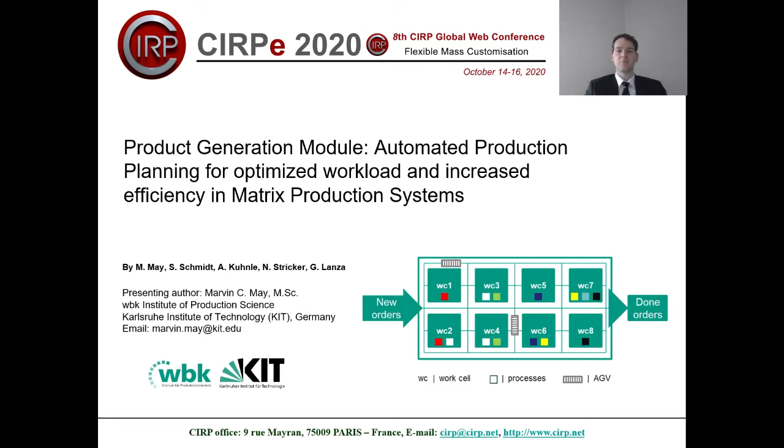On behalf of the entire team, I would like to warmly welcome you to this presentation of the publication entitled Product Generation Module, Automated Production Planning for Optimized Workload and Increased Efficiency in Matrix Production Systems within the CIRPe2020 Global Web Conference. The CIRPe2020 is about the topic of flexible mass customization, and matrix production systems serve as one manifestation of a flexible mass customization ready production system.

There are quite a few reasons for matrix production systems to gain attraction within the last periods of time. First of all, there is a trend towards mass customization in the sense that many customers require individualization and require high quality at low prices. This poses several requirements on regular production systems and often comes hand in hand with shortening product life cycles. Additionally, external regulations, in particular in respect to protecting the environment, can have major effects and push companies towards matrix production systems as a manifestation of flexible mass customization.

Matrix production systems are both adaptable and flexible, as they allow products and the combination of products to change within the lifetime of the production system. However, they require a very high investment cost and are expensive to operate and install. Thus, our proposed product generation module increases the efficiency and enables companies to overcome the expensive integration of matrix production systems by boosting their turnover afterwards.

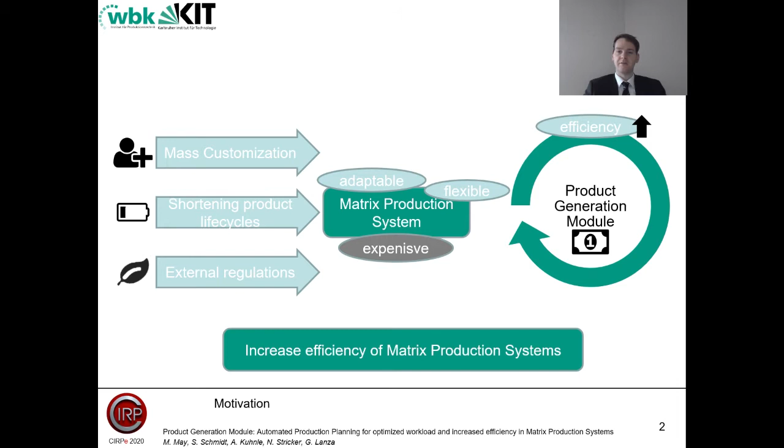Let's look at matrix production systems and how they are constituted. First of all, matrix production systems are made of a matrix-shaped layout. For instance, the figure below, which is a 4x2 matrix layout with redundant work cells. Partially redundant in the sense that each work cell has the ability to perform different value-adding activities, which we dub as processes in this case, within work cells. And some of them might be similar, some of them might be equal. However, the important part within matrix production systems is the ability of more than one work cell to perform a given process.

Furthermore, the ability and flexibility of matrix production systems come from the decoupled material flow. This is realized by the implementation of AGVs, which autonomously guide the material transport within the system. This is the reason for matrix production systems being very flexible. Thus, whenever a machine encounters any failures or further troubles, one singular machine does not affect the output of the entire system heavily, and the rest of the system can still work as prepared, and thus it allows the production system to deal with much larger flexibility and much larger demand changes.

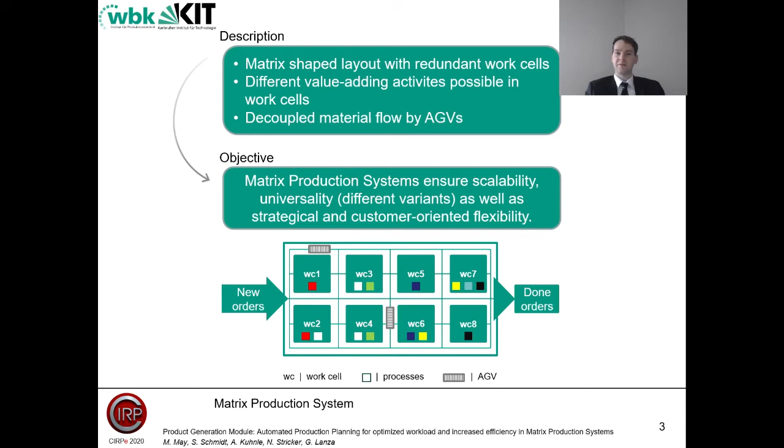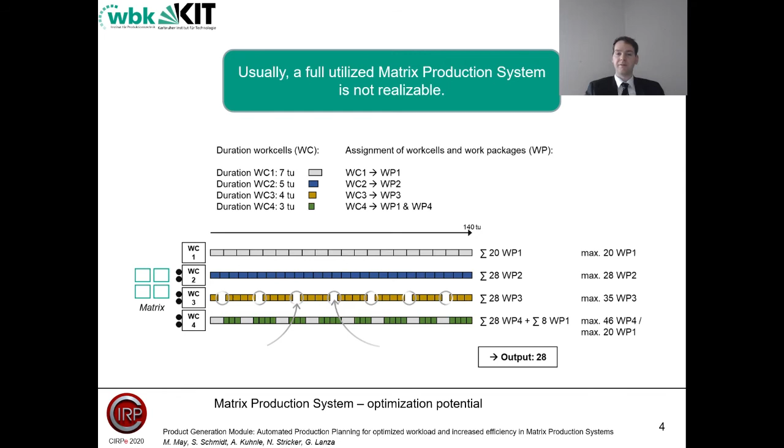However, such a matrix production system cannot be fully utilized, even when regarding a perfect and maintenance-free system. Depending on the number of work cells and concrete work packages, the figures will vary. However, we can, for instance, look at the figure shown on this slide, where we can associate many different tasks with the different work centers in the system. And nevertheless, there will be some gaps within certain work cells that can be used for the production of minor products, for the co-production of products other than the ones we are looking at right now. Hence, the optimization potential in matrix production systems is there, in particular as we are able to use them, since we have a decoupled material flow, which could not be implemented with a regular line production system.

So the proposed product generation module optimizes the workload in matrix production systems by enabling the co-production of portfolio-external or minor products which do not deteriorate the quantity and quality of the main products to be produced by the production system. And since matrix production systems implement customer-oriented flexibility, we can easily assume a fluctuating demand, and the ability to produce minor products additionally allows us to have high production system usage even in times of lower demand.

Let's have a look at the proposed structure. First of all, it is required to have a look at the free capacities that could be used within the system. That typically entails looking at the free capacities in transport, free capacities in different processes within the system, but also free capacities that could allow replanning of the entire system.

Having the free capacities and the ability to allocate different possible products that could be produced to the available free capacities allows us within the third stage to develop different and alternative solutions for the integration and combination of major and minor products. Each of these alternative solutions has to be checked for plausibility, and the profitability analysis has to be determined in order to find the most profitable solution.

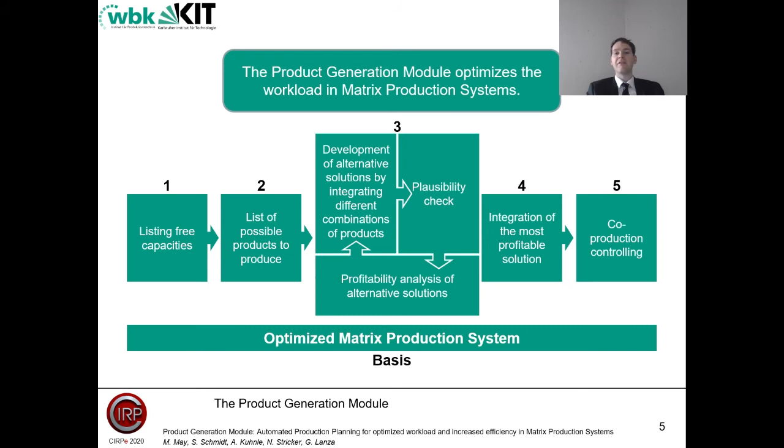Nevertheless, there are quite a few threats to the implementation of such a product generation module, which typically include a shift of focus towards integration, and shifting the focus towards the integration of minor products could, without appropriate countermeasures, negatively affect the quality and quantity of the major products. Thus, it is quite important to regard both of them.

Let's look at the short case study. In the top part of the slide, you will find the matrix production system at hand. That is either a 4x2 or 4x3 matrix production system with given process times for major and minor products. Keep in mind that major products refer to the products the system was built for, and minor products refer to the products identified with the product generation module and which are placed additionally within the system.

Given our system and given a different change and layout of the system as well as different process times, we have identified that within a case study, the integration of the product generation module allows the output of main products to remain constant, but also increases the output of minor products.

For instance, in a general configuration case, we're able, almost without any loss of time and quality for the main products, to produce minor products in high quantities and thus increase the workload of work cells tremendously. Depending on the situation, you're required to do such a case study and implement the most suitable solution.

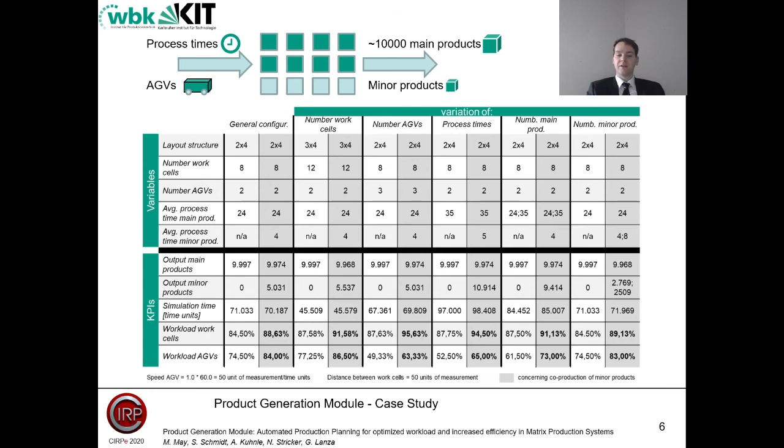All in all, there are quite a few advantages of implementing such a product generation module, as it can be implemented even with a varying number of work cells and layout. It can be implemented with a varying number of AGVs and a varying speed of the AGVs and distribution within the system, but also with the average process time of the main products.

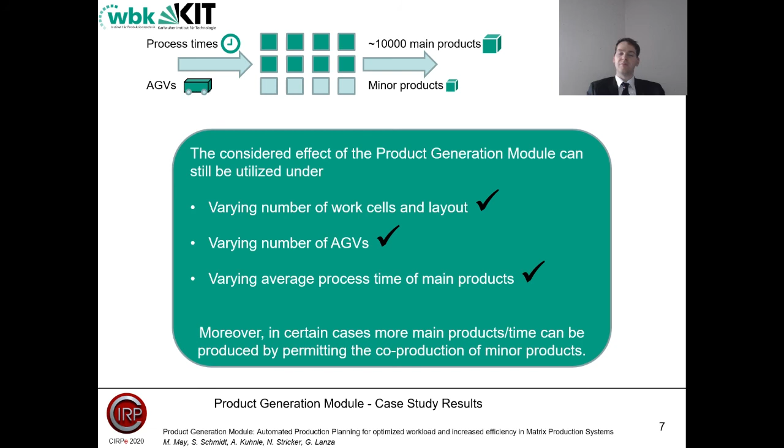This, however, requires, in the first phase, a very detailed identification of free capacities, as that would restrict the selection of potential minor products. And in some cases, due to a better balancing of the AGVs, which allows us to facilitate the product generation and increase the speed of product generation with the help of minor products. Nevertheless, that will not be the case for usual production systems.

All in all, there are quite a few interesting results we have gained from implementing such a product generation module. First of all, that the ability to use the co-production principle is given for matrix production systems, even across varying parameters, and allows the production system to effectively boost the turnover and decrease the disadvantages that come with the high investment cost for matrix production systems.

Furthermore, having a product generation module allows the production system to achieve even higher flexibility and to countermeasure the problems of flexible mass customization in traditional production systems.

There are quite a few topics to be researched in follow-up studies, which first of all should focus on the application of the product generation module and the principle of co-production to different production systems and potential production networks, but also the problems that come hand in hand with the production of minor products or even portfolio-external products that could relate to supplier substitution, that could relate to substituting your customers, and so forth.

Last but not least, one of the main topics should focus on the order release control policies, since the integration of many different products, including the minor products, highly increases the complexity of production control and allows the integration of more intelligent production control policies.